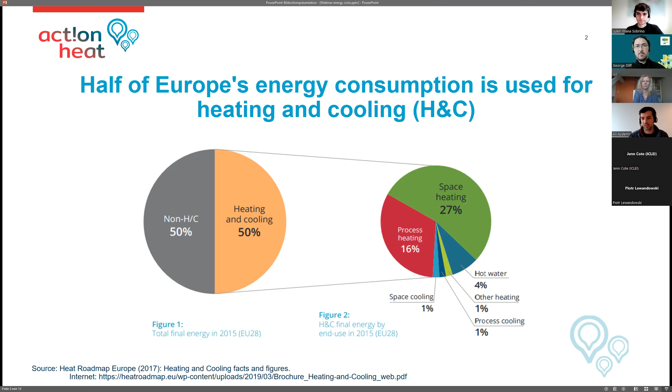And if we go to the energy carrier statistics, so I also quoted the sources here, you can find very interesting figures also on your countries here, you have country fact sheets. You will see that in most countries, natural gas so far remains the dominant energy source, which is causing problems right now facing the Ukraine crisis.

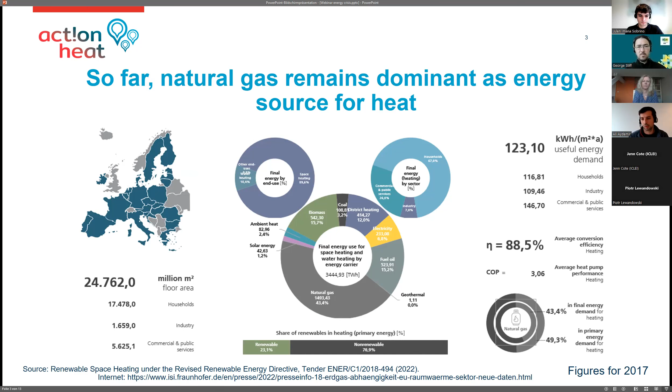And here's where heat planning comes in. Basically, heat planning consists of, I would say, 4 steps. You can also find guidelines with 3 up to 5 steps, but it's all going in a similar direction.

What you do within your municipalities is usually a status quo analysis. With statistics and estimations, you describe the heat demand - how heat is provided within the community, which infrastructure and technologies are used. But it's also very important within the status quo analysis to figure out the condition of buildings, the renovation status - are they insulated, is there room for improvement?

After that, you go to the potential analysis, where you figure out how to change the energy carrier towards renewables within your municipality. Usually you have to engage stakeholders, since in most countries and municipalities in Europe it's not the municipalities managing the energy sources, but the utilities or suppliers. So here you have the first step where you involve stakeholders and start some kind of potential analysis, like cost benefit analysis, etc. But it's also very important to figure out the potentials to reduce energy demand among your buildings.

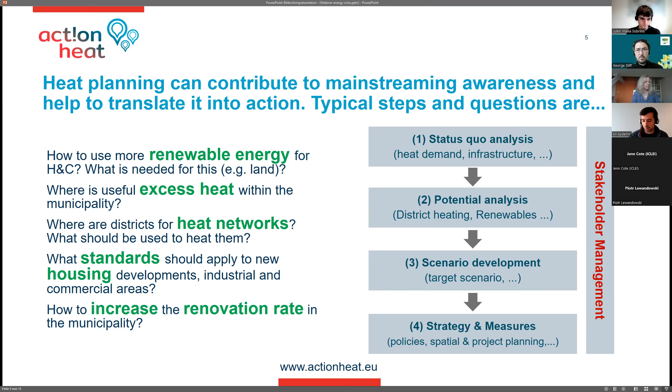As we are facing the energy crisis right now, the question is: what is the connection between heat planning and the energy crisis? I would emphasize stakeholder management right now, because right now you have the awareness, so you can create communication channels and get in touch with the relevant stakeholders.

We also have regulation coming up in Netherlands, Swiss, and Austria. What's maybe also important to note is that within the revision of the Energy Efficiency Directive, there's also a paragraph on heating and cooling planning, which aims to encourage regional and local authorities to prepare local heating and cooling plans, at least in municipalities with population greater than 50,000. You can check our website for further insights - we did, for example, a very extensive survey on heat planning success factors.

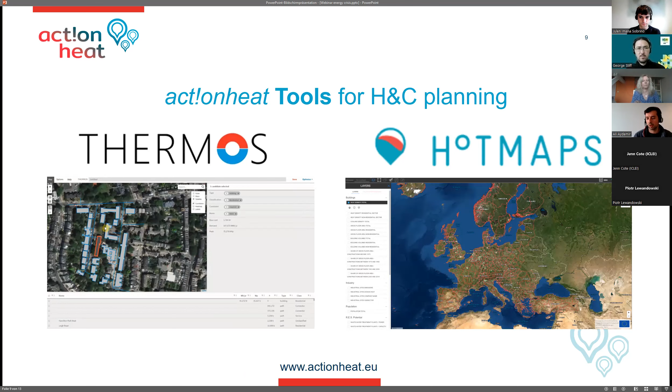What we can offer support for: we have two institutes very experienced in applying tools for heating and cooling planning. Thermos, on the one side, is very good to analyze potentials for district heating - that's on the left side, it's also open source, you can check it on the website. On the right side you see Hotmaps, with various functionalities related more to general heating and cooling planning, also open source, also available on the website.

Okay, and then I'm at the end of my presentation. I'm happy to discuss with you afterwards. I would give over the stick to Julien.

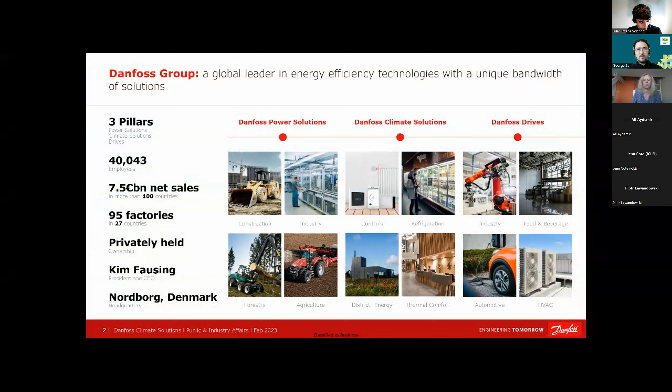So first of all, thanks again for inviting us. It's a great opportunity to engage further with municipalities and share our insights from practical experience in terms of district energy and sector integration. Danfoss Group is a global leader in energy efficiency technologies. I won't go into detail here, just to show that we have these three major segments. I'm part of Danfoss Climate Solutions, and that is also where the district energy business unit is represented.

Danfoss in itself, we try to lead by example. Our own operations shall be carbon neutral by 2030. I'll say a few more words later on in the presentation about our headquarters campus in Nordborg, which has been carbon neutral since last year.

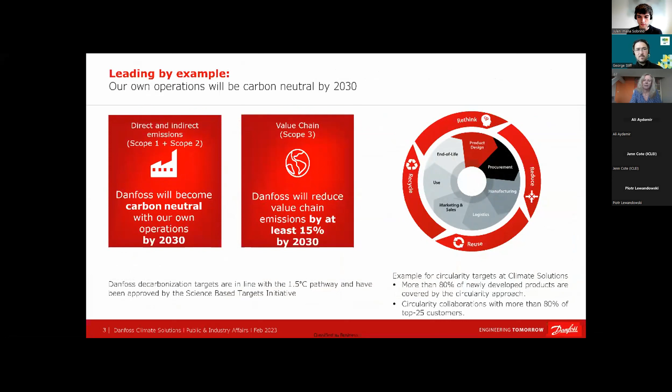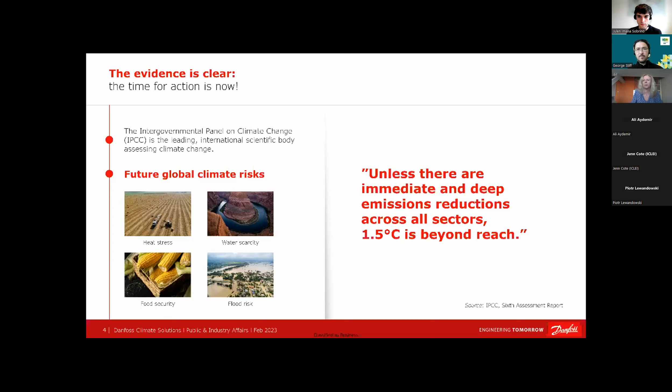I don't think I need to emphasize this in this forum. I just thought I'd copy in this important statement from the latest IPCC report, which makes it once again very clear that we really need to act in order to achieve the 1.5 degrees target.

And it's also very clear that heating and cooling plays a very important role. Previous speakers have already shown statistics in that respect, so I'll be very brief here.

Just to remind all of us, the European Union has made this commitment to halve the greenhouse gas emissions by 2030, or reduce them by 55%, and to be carbon neutral by 2050. It's enshrined in law, so it's not just a commitment, it's not just an announcement - it's really a legally binding commitment.

And we see that heating and cooling plays such an important role because it represents half of the total final energy consumption in Europe. And most of that, if we look at the worldwide figures, is based on fossil fuels still, and that's also the case in Europe.

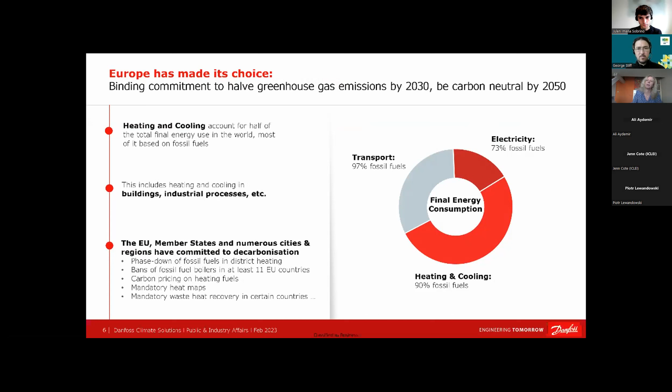Carbon pricing was just mentioned, and also then several countries who have already mandatory heat maps. Again, the Energy Efficiency Directive at European level will hopefully also give here another push that heat maps become really the norm or the standard throughout Europe, because without mapping the heating demand and the heating supply, it's difficult to make best use of all the sources that we have.

And that's indeed for us very important to state here, that the entire system needs to be optimized. So we can't just look at a source, or at a building, or at the district energy grid in itself.

It's the together that really plays a very important role, where we really need to make sure that on one hand side, we decarbonize the energy sources, that on the other hand side, the distribution is efficient. And then, of course, where it arrives then in the building or in the industry or wherever the energy is then being used at application level, that there also we have efficiency.

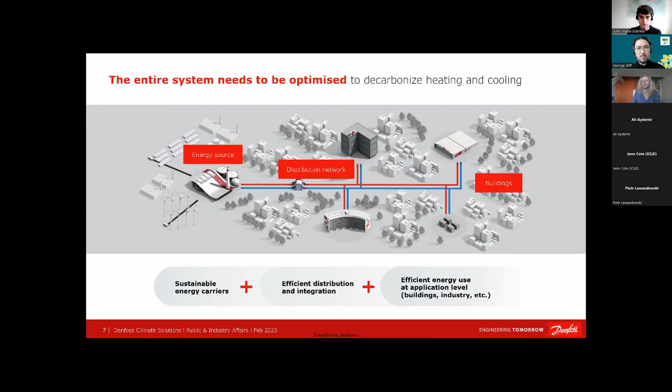So energy efficiency needs to be embedded throughout the entire system as we are decarbonizing the energy. From our perspective as Danfoss Climate Solutions, the integration of the energy sources and the sectors is therefore really a key priority. It's about moving out of the silos and connecting the various heat sources with the heat demand.

And in order to make this as efficient as possible, there are three steps that, from our perspective, really play a key role. It's on the one hand side, and first and foremost, to reduce the energy use and to optimize the energy use, whether that's in industry or in buildings.

It's to reuse the energy, make use of all the heat sources that we have, including also the waste heat that we have, or the excess heat, if you like. And that excess heat can come from many different applications, such as process cooling, such as data centers, such as supermarkets, cooling in supermarkets, for example, etc.

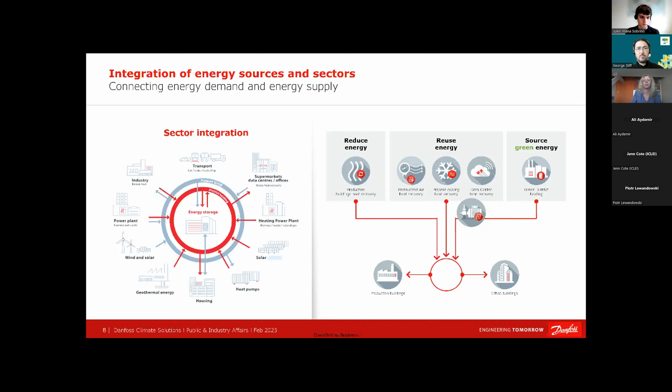So there is a huge untapped potential, which can very well be linked to district energy and fed into either bigger district energy networks or microgrids. And then, of course, sourcing green energy when it comes to district heating, to decarbonize the energy sources wherever and as quickly as possible.

Then there is a lot that can also be done in terms of digitalization, in terms of optimizing right from the start at the district heating utility level, via the distribution level through to the buildings level.

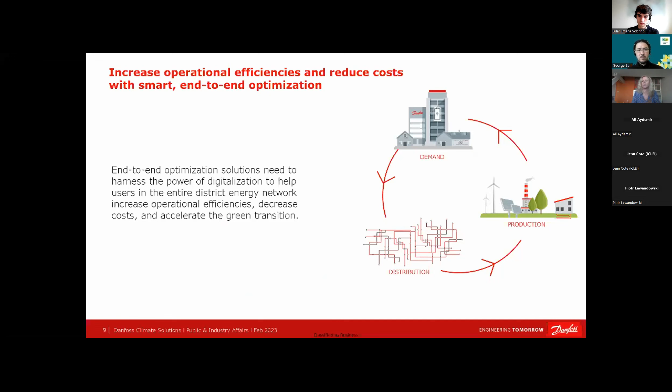So really optimize how the systems and installations work, make sure that pumps, for example, just match the demand, that we don't have overcapacity, that everything is correctly sized, and also that outside factors like the weather conditions are taken into account when calibrating the heat supply. So there are solutions out there that allow this end-to-end optimization. Danfoss is one of the providers of such solutions, also connecting it to our hardware.

Looking at this specific case of using excess heat, here's an example of where this can be applied as a priority. If we look at critical facility cooling, meaning applications and facilities that need cooling, whenever you have cooling you will also have excess heat, and that excess heat can then be recovered. That's a very interesting model, because otherwise we waste heat that could be used.

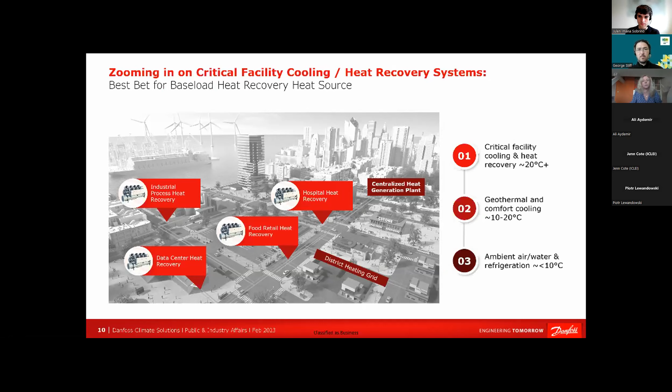So if I'm looking at this a bit more in detail, we can combine very well the different applications. In such critical cooling facilities, we can on one hand require cooling, on the other hand require heating. If we combine the two together, we can very much increase the efficiency from a total efficiency perspective, or total efficiency ratio as we call it.

As you can see in this example, if we look at cooling only separately, the coefficient of performance would be 5.7. If we only look at the heating, it would be 5.3. But if we combine the two together, cooling on one hand and heating with a heat pump on the other, we can increase the efficiency quite significantly.

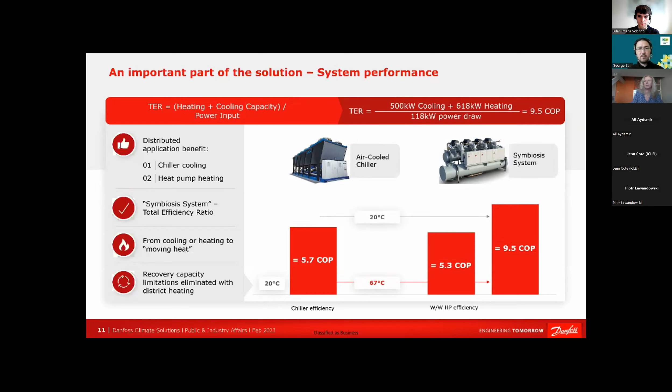If we look at our own experience of what is being used, we have over 140 projects running where we use these excess heat sources and combine the heating and the cooling as well. As you can see in the numbers here, without going into bigger detail, the process and wastewater, district, and data center cooling.

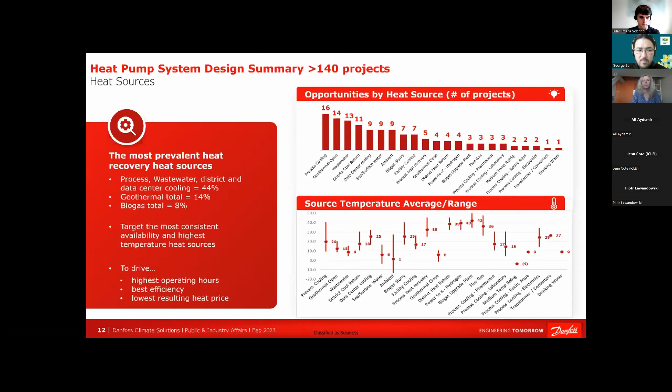Availability of excess heat is consistent and stable, and the temperature is also interesting. Data centers are a very good example for that, because the excess heat is constantly available, so it can be constantly used.

A practical example here from our Nordborg campus, I was mentioning that in the beginning of the presentation, it's been carbon neutral since 2022. How did we do that? We first of all optimized energy use by reducing as much as possible the energy consumption using solutions such as regulating the temperature and hydronic balancing. Very much not rocket science, but solutions that really help reduce energy use. Then, of course, there's also the important part of switching electricity to green electricity, which has been the case since February 2021, using wind energy for our campus.

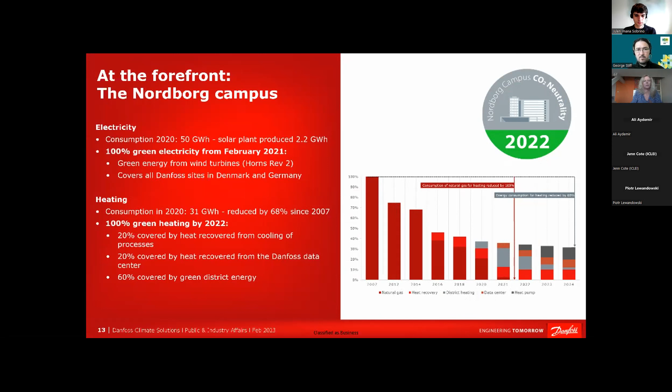And then decarbonizing the heating, which is a mix of different measures: on one hand the recovery of heat from the cooling of our processes, where we also recover heat from our Danfoss data center, and the rest of the heat is then sourced from district energy, which is also green, decarbonized district energy. Bringing all of this together allowed us to decarbonize the entire campus.

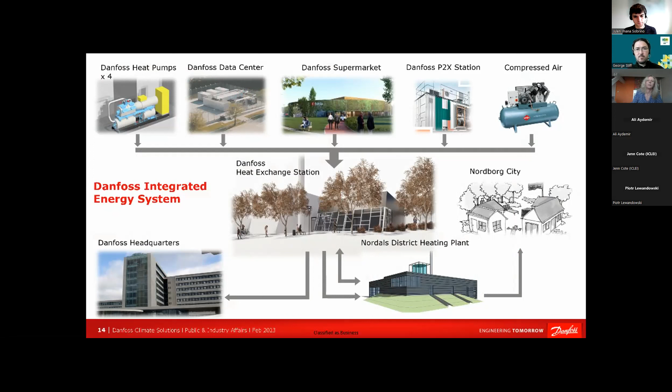This is the overall picture of this decarbonization. It's showing how we combine those different excess heat sources and opportunities that we have at the location of our Nordborg campus. It's the data center I was mentioning, also connected with a supermarket and its excess heat, power-to-X, and compressed air. We have this heat exchange station in the middle, where we can recover the heat and then feed it into the district heating plant to heat the village of Nordborg and our own headquarters.

So that's a very brief overview. Happy to answer questions as well. And yeah, I'm trying to stop sharing... Yeah, it worked, okay good. So happy to answer questions.

Thank you, thank you very much, Andrea. Very interesting. Thank you for giving us this overview of how we need to optimize the integrated system, and giving us the technology perspective, let's say.

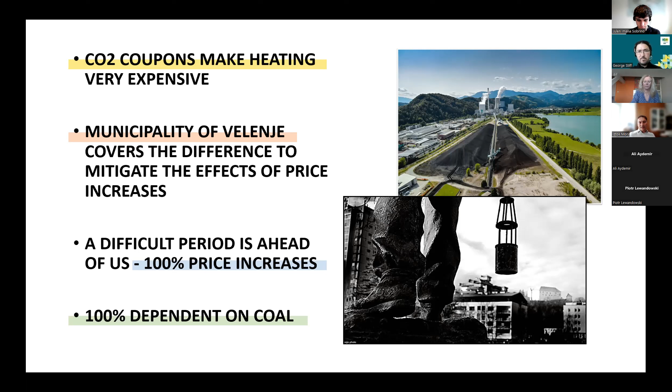Of course, for our citizens, the municipality covers the difference to mitigate the effects of the price increases. But I think that will change in the future, because now we cover the difference for all our citizens. For the next months on, I think we will change that so we only cover the ones who are most vulnerable in our city. And like I said before, for now, we are 100% dependent on coal for our heat system.

We also have to update the construction of new thermal stations. That's because if you want to move to green sources, we have to lower the temperature regime of operation from the current 120 degrees to around 85 degrees Celsius.

In the second phase, we have to establish some new units, and the first important thing is the different sources - I think this is something we already know. The first thing we will build is a new solar thermal power plant for the summer regime for the whole district system. Our district system is the second largest district heating system in Slovenia and is the oldest one.

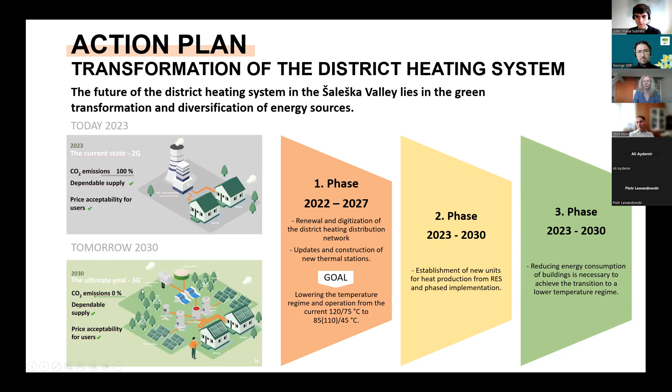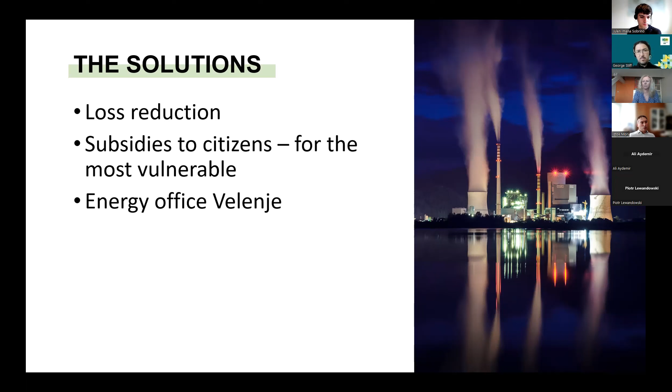Our solutions: loss reduction, also in the buildings and for our citizens, subsidies to the citizens for the most vulnerable, and the Energy Office Velenje. This is very important for our people, because renovation of all the buildings in the city is also very crucial if you want to go to green sources. Right now we have just about 10% of all buildings renovated and suitable for applying green sources to them.

So just for the end, new solutions will be the most optimal in terms of technology, price, and stability. This is our goal for our great challenge, because in our city the mission to become climate neutral and a smart city by 2030, and also to make a just transition by 2030, is something which will go hand in hand — actually the same goal. Because we cannot make a just transition of our city until the coal mine is shut down, otherwise we won't become a climate neutral city by 2030. Thank you very much.

Now that we have had our three presentations, we'd like to open it up to everybody to ask their questions. I think the most effective way is to put it into the chat, but if you wish you can also raise your hand. I will maybe start things off — I see that in the chat some have already asked questions to Andrea, but she's already answered there. So I will ask a question first to Ali as the first presenter.

So we've been talking about no regrets. The energy crisis is in the background, as you mentioned, the elephant in the room. And then you focused a lot on heat planning, which I think is a rather long-term approach. But what kind of recommendations might you have for doing heat planning in a way that's resilient, that can minimize regrets in the system, that's adaptive?